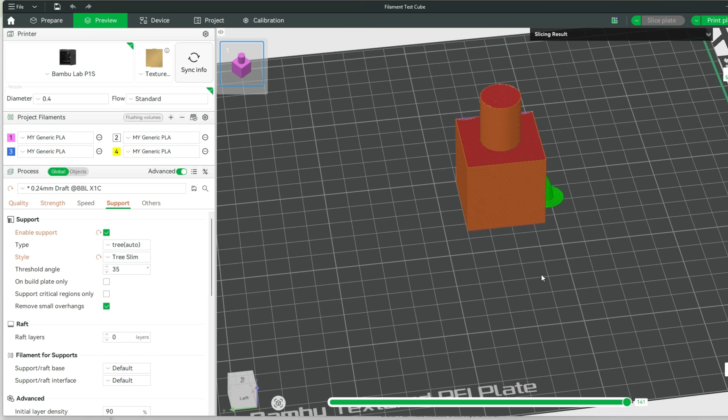These simple setting changes cut my print time by 30%. I'm going to walk you through how to use each and every one of them and show you the results at the end.

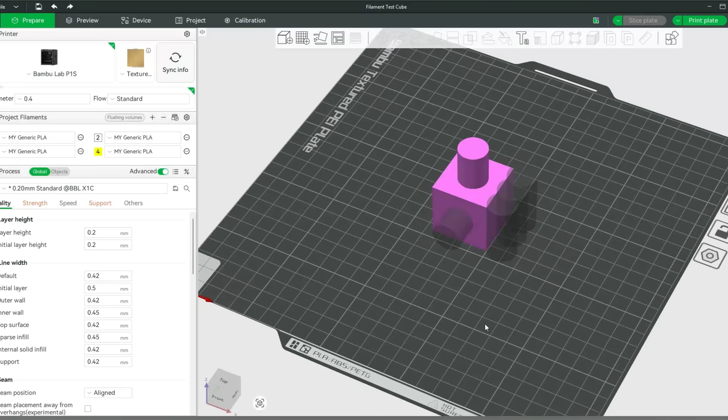Jumping right in, we are going to try to speed this print up without completely destroying the quality. So let's get our baseline. Baseline 53 minutes, 26 seconds. And we're going to try to speed this up. Again, most of these are just your standard default settings that we are running through. Just make this print a little bit quicker.

Now, first thing I'm going to do is jump over to our prepare tab, and we're going to increase our layer height from 0.2 to 0.24. And if you really want to speed some stuff up, you can actually go to 0.28, and that is going to really kill the quality of your print, but definitely speed it up. So 0.24 is something I'm comfortable with.

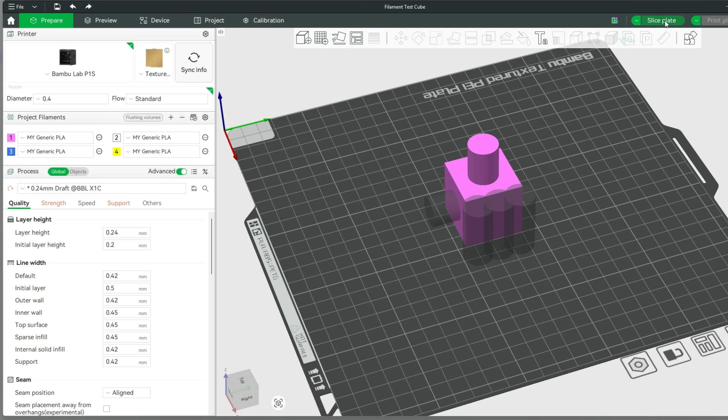We'll go ahead and slice this just to get a baseline of how much time that one setting can save. And you can see from 53 minutes down to 47. So we're saving around 6 minutes just with one setting. And I have swapped back and forth between those settings a lot, and we usually don't notice a lot of quality downgrade by doing that.

The next thing we're going to look at, jumping back over to prepare, is we're going to go down and increase our line width. And in doing this, we're going to set our default line width to 0.48. It's going to give us a little bit of added strength. You could bump this up to 0.52. Again, we just like to work in increments of 0.04 because that's the nozzle size that we're using.

For those layers, I'm going to make sure we set our outer wall to 0.48 and our inner walls to 0.48. So it shouldn't change a whole lot here, but when we go and cut down the number of walls, it's going to help us out a little bit.

The next thing we are going to do is jump over to our strength tab and make a couple quick changes. So for this print, we're going to drop this down to 2 wall loops, which should still keep the quality. And we're going to put our top and bottom to 3 layers. And the next option we're looking at is we're set to 15% infill. There's not going to be any difference between 15 and 10 that's noticeable, so we'll drop this down to 10.

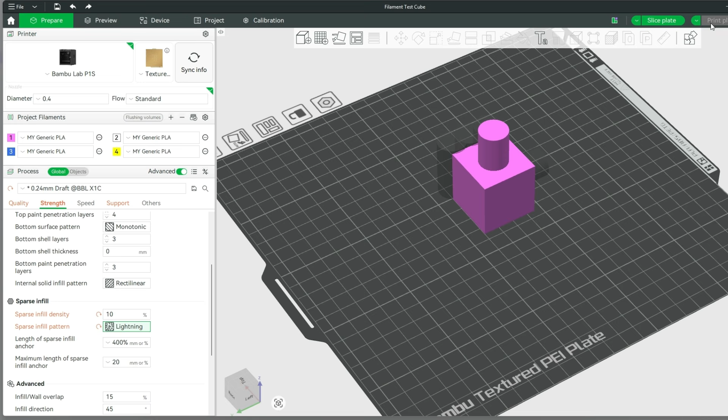Do not use grid if you're trying to speed stuff up. You're going to want to use something like adaptive cubic or possibly even lightning, but because we're trying to speed it up as much as we can, we're going to go with lightning. And we'll go ahead and slice the plate now. And you'll notice, hey, we're down to 40 minutes. So we've cut 13 minutes off of this print and did it in just a few settings.

The last thing I want to talk about is your support. Now, on a print this size, support is going to be very, very minimal. You'll see right here, we're at 1 minute and 22 seconds of support. And that is using just your normal auto. I am going to switch this to tree, and I am going to switch this to slim just because we're trying to speed it up as much as we can.

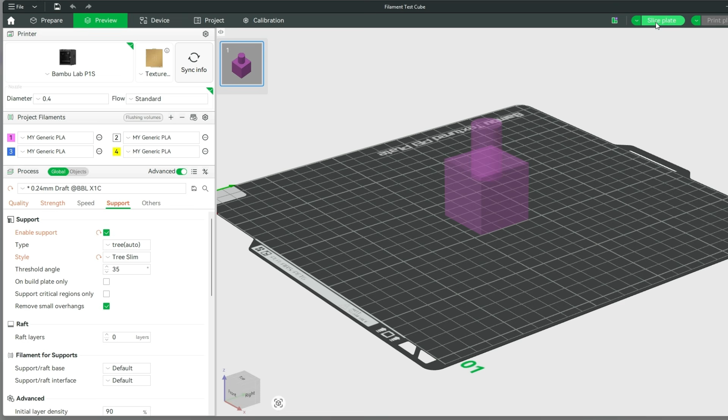We'll slice the plate. And right there, hey, you know what? We lost about 20 seconds or so off of our total support time. Not a lot of savings on this print, but on a print that has a lot of supports, you might be able to save quite a bit of time.

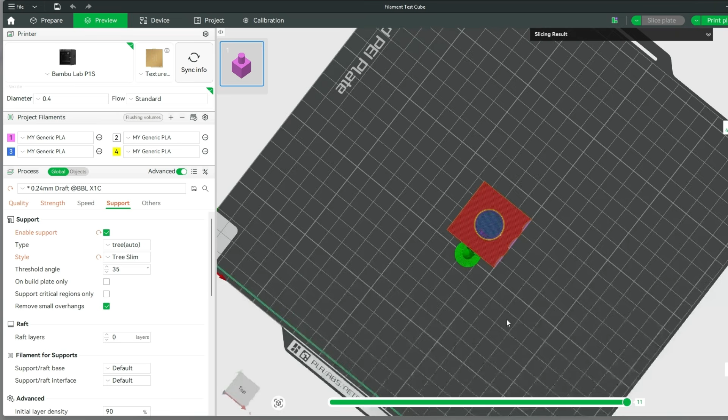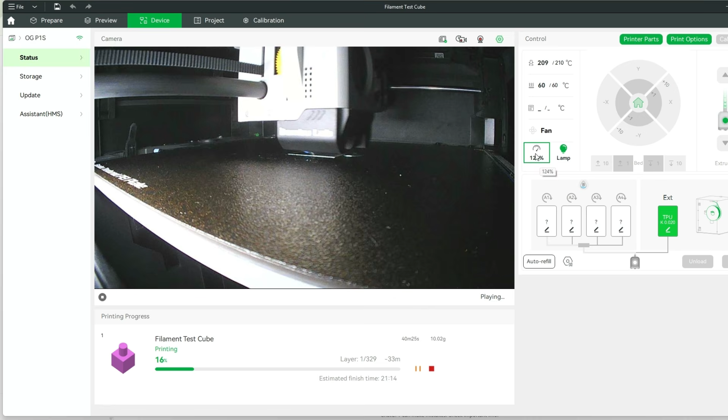So we're going to look through this really quick, make sure it looks good. See what everything looks like. Seems like we've got a print that's going to work. So I'm going to hit print and we're going to show you the final setting just to speed this up a little bit. The very last thing while the print is going that we're going to modify is jumping into the device settings and going from 100% to sport mode just to save us a little bit extra time. Stick around, I'll show the results and compare them side by side.

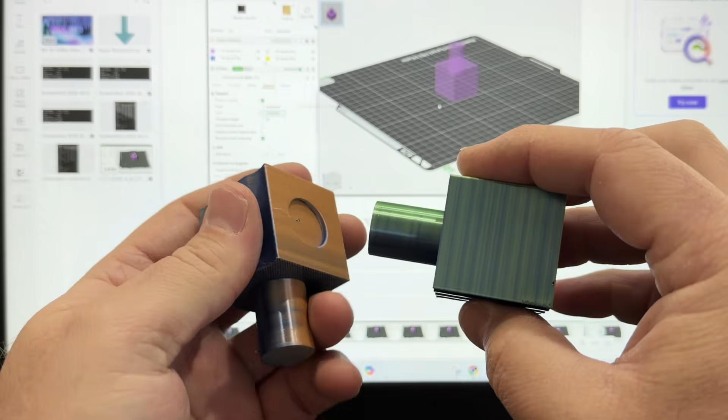They look pretty good. If this is something where you need quality, be mindful of the settings that you're using. If you're just trying to get something done, definitely go with these settings here.